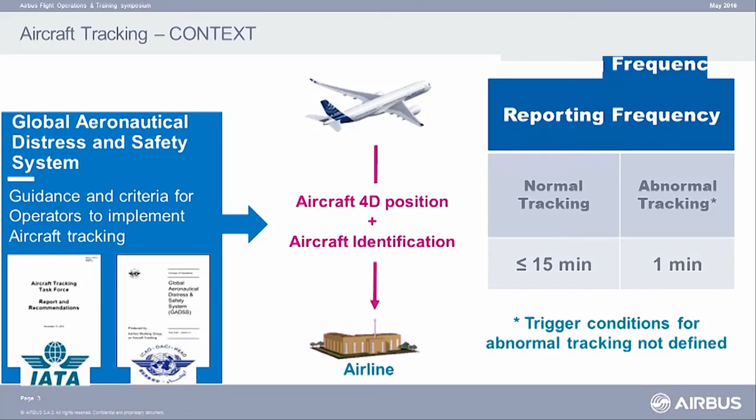Last year, during our flight ops and training regional seminars, we presented to you the ICAO status, and we presented that ICAO intended to introduce a recommendation on normal tracking for both oceanic and remote areas in November of last year, and they planned to make those recommendations applicable from November of this year.

As ICAO has changed this position since last year, we decided to make this presentation to give you an update on the regulations, as well as to present to you our solutions on aircraft tracking.

So today my presentation will be divided in two parts. First of all, we will review the regulations, including information on local regulations, and then I will present to you our solutions.

As I said in the introduction, ICAO intended to make the recommendation on normal tracking applicable from November of this year. But the Air Navigation Committee identified that this would create an undue burden for the industry if some open points were not clarified before the applicability date.

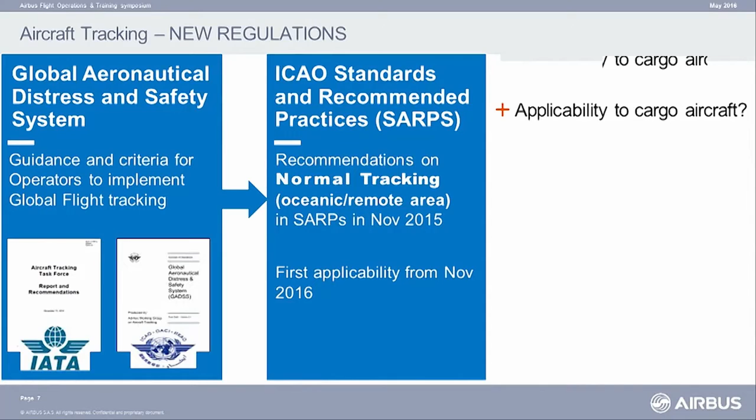These open points include the following: what about the applicability to cargo aircraft? Today, the regulations do not apply to cargo aircraft, whereas some member states do not agree with this position.

What about operation in polar areas, where we have some data link communication coverage issues? What about operations with limited flight over oceanic areas? Do these recommendations apply to this type of operation?

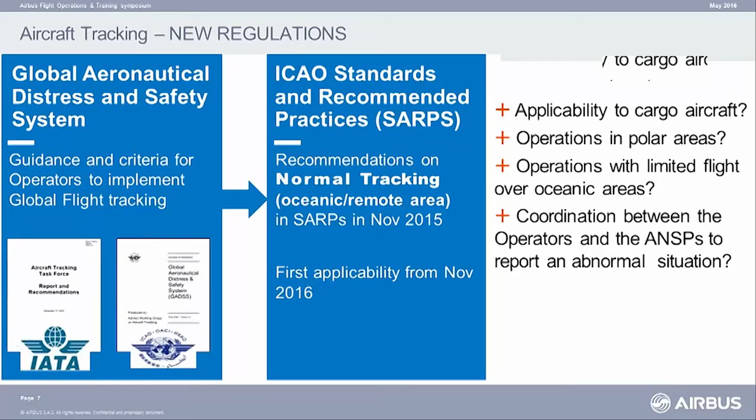And finally, there is a need to set up proper coordination between you, the operators, and the air navigation service providers in case of abnormal situations, including the non-reception of position reports.

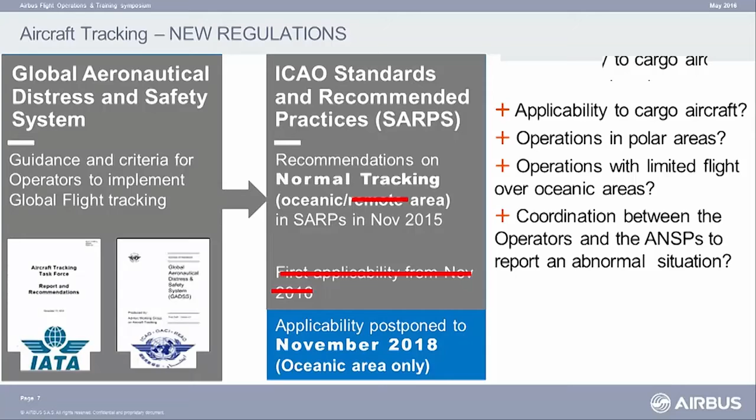As all those points are still open, ICAO decided to postpone the applicability date of those recommendations to November 2018. They also decided to reduce the scope of this applicability to oceanic areas only, because there is no standardized, clear definition of remote area.

Having said that, what about the national authorities? They have to define their own regulation, and it's up to you to monitor this regulation. It's important because the local regulation may differ from the ICAO recommendations.

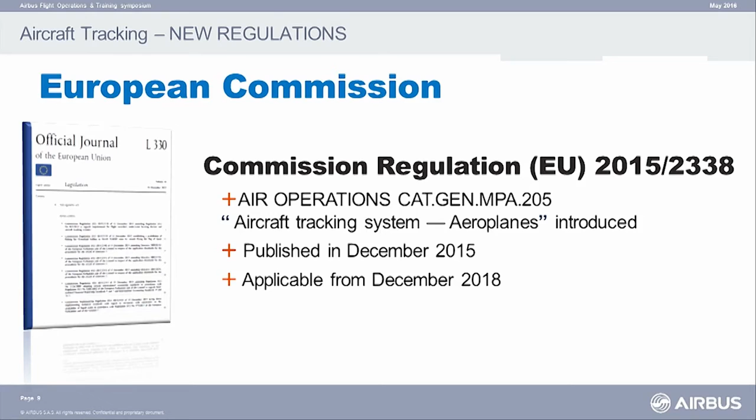There are already some regulations that have been published. This is the case of the European Commission, which has published regulation on aircraft tracking systems in the air operations regulation. This regulation will be applicable from December 2018.

Concerning the civil aviation authorities of Singapore, they have also published their own regulation, applicable from July 2016, this year. But there is a specificity with this regulation.

In fact, if you read this regulation, it clearly stipulates that the aircraft tracking system shall not make use of a voice report through HF.

What does it imply? In fact, it implies that to cope with this regulation, you pilots can use position reports by voice using other communication means. But from November 2018, you will have to implement an automatic reporting system.

So this is an example of local regulation for which the requirements differ from the ICAO recommendations.

Having said that, what about our solutions? For those who were present last year in our regional seminars, we presented 3 solutions that have the advantage of being easily implemented with no additional workload for you in the cockpit. These solutions are not applicable for A300-600 aircraft as well as for the A310 aircraft. I will come back to those aircraft types later on in my presentation.

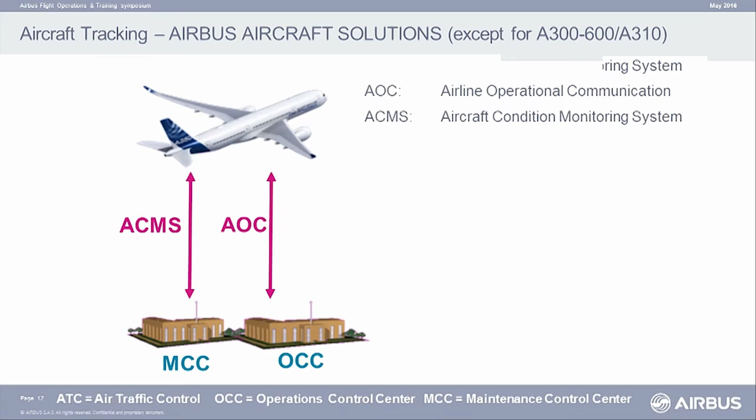The 3 solutions that we have proposed to you are, first, the use of the AOC function, which is used by you pilots to exchange data link messages with your OCC center. The other possibility is the use of the ACMS solution, which is used to exchange maintenance messages or engine parameters with your maintenance control center.

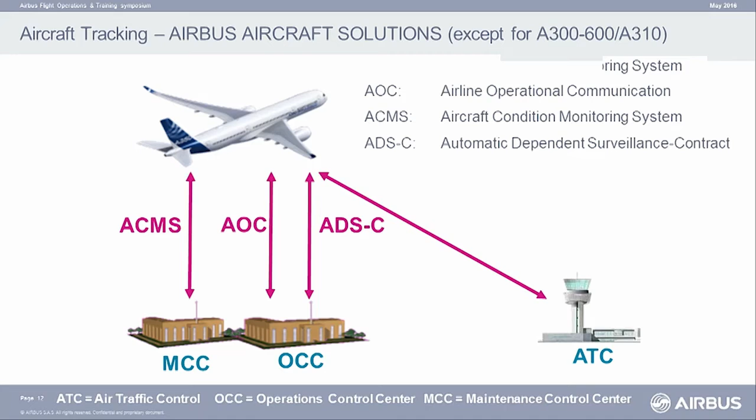The last solution is the use of the ADS-C. The ADS-C is basically used to transmit position reports to your ATC center, but it can also be used to transmit such information to your OCC. So what we are going to do now is review the 3 solutions and see the advantages and limitations of each. First of all, regarding the normal tracking capability, they all have this capability.

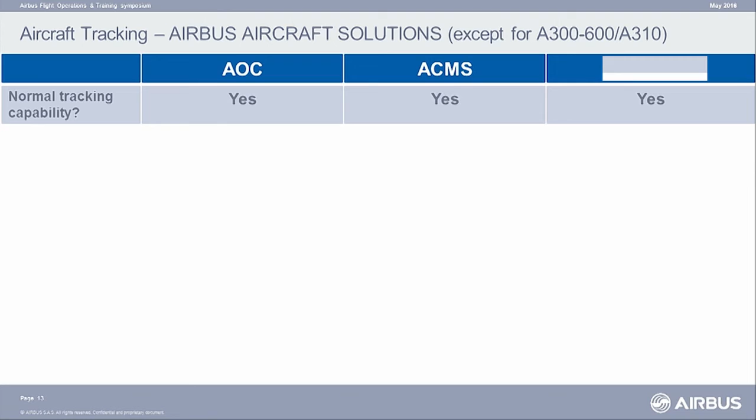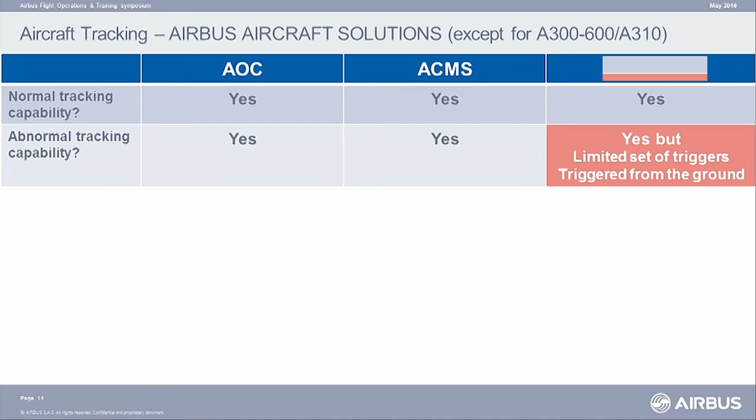Then, abnormal tracking capability - there is a limitation with the ADS-C solution. As I said, this solution was basically set to transmit position reports to the ATC center, and therefore this solution is standardized. So there is no possibility for you to customize the messages exchanged with the ground. The only possibility to trigger the abnormal tracking mode is by receiving on ground the so-called on-event message. As there is a limited set of on-event messages in the standard, there is a limited set of conditions to trigger the abnormal tracking mode.

Regarding priority in terms of communication through ACARS, because this is the ACARS network which is used for those solutions, the ADS-C messages have the highest priority, and the ACMS messages have the lowest priority. For the ACMS messages, in case of abnormal tracking condition, there is a high probability that maintenance messages will be transmitted to the MCC. Therefore, there is a probability that the position report messages be delayed.

For the ADS-C solution, if you use this solution, you will transmit position reports to your OCC, and this could downgrade the performance of the transmission of position reports for ATC purposes. So we are not in favor of such a solution.

Regarding the impact on hardware, for the two first solutions, there is no impact if you are equipped with data link, including the appropriate communication means for the routes you plan to operate. For the ADS-C solution, there is no impact if your aircraft is equipped with FANS-A or FANS-A Plus solution for the A320, 330, and 340 family, and this is basically the case for the A350 and A380 aircraft.

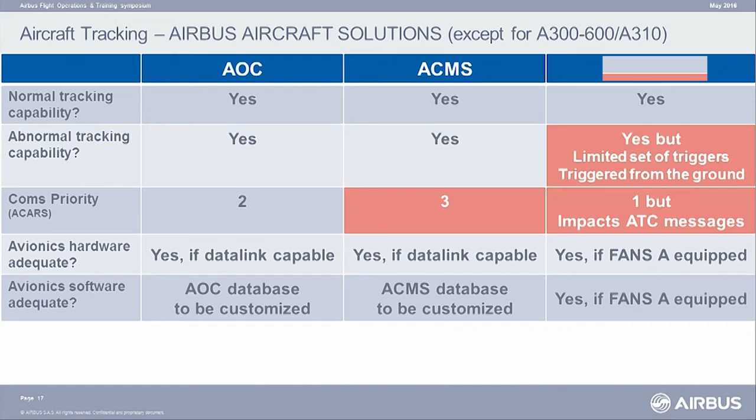What about the impact on software? For the AOC solution, you'll have to customize the AOC database. For the ACMS solution, you will also have to customize the ACMS database. And finally, for the ADS-C solution, you'll have to implement a logic on ground to trigger the abnormal tracking mode.

Regarding the cost impact, for the three solutions, as you will transmit new messages, there is a cost impact due to the transmission of data, and the cost varies according to the contract you have established with your data link service provider. For the AOC solution, you will also have to customize the database - this is also the case for the ACMS solution. And for the ADS-C solution, you will have to put in place a logic to trigger the abnormal tracking mode.

So we have seen that there are some limitations for the ADS-C solution, and there is a limitation for the ACMS solution. So to conclude, the optimized solution, and the solution that we recommend to implement, is the AOC solution. This is a solution that we know some of you operators already use to transmit position reports to your OCC centers.

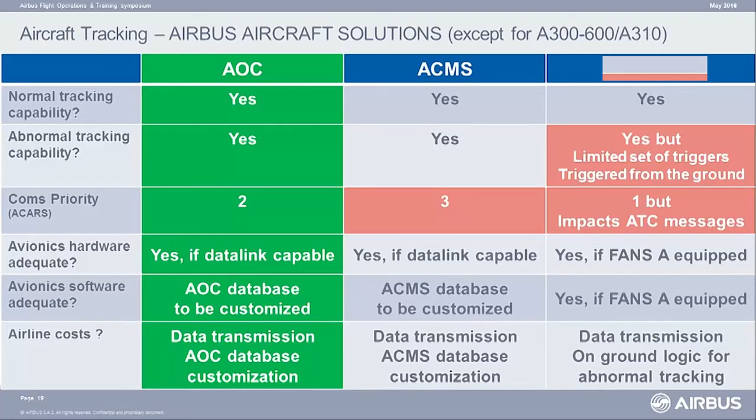Having said that, what about abnormal tracking and what about conditions to trigger the abnormal tracking mode? As I said in the introduction, ICAO relies on the industry to make proposals on conditions to trigger the abnormal tracking mode, and this is what we, Airbus, have proactively done.

So what we have done: we have analyzed data from more than 1,000 real flights, we have also performed flight tests, and we have defined a set of conditions to trigger the abnormal tracking mode. An important thing is that we want to avoid spurious triggers. So this activity is now completed.

The next step for us is to launch the development of AOC solutions. So we have started discussion with our AOC providers, Honeywell and the other provider, to define a generic aircraft tracking solution which is valid for both normal and abnormal tracking. The other provider is Rockwell Collins.

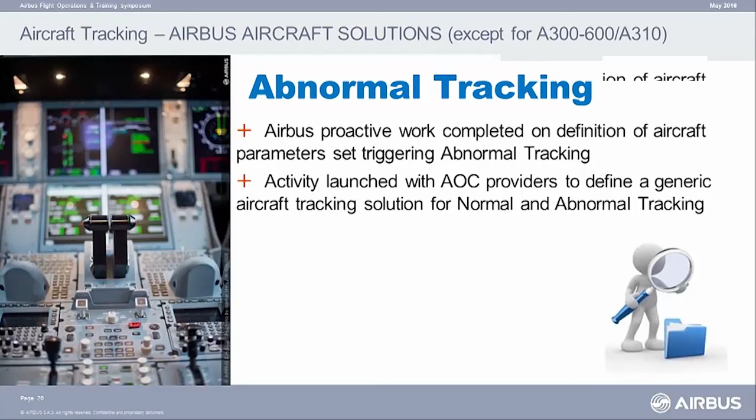What about the A300-600 and the A310? For those aircraft types, the only solution we can propose to you is based on the use of the DFDAMU. There is a limitation with this solution because we do not have the capability to detect abnormal conditions. That is to say that the only way to cover normal and abnormal tracking mode is by sending the position report every single minute.

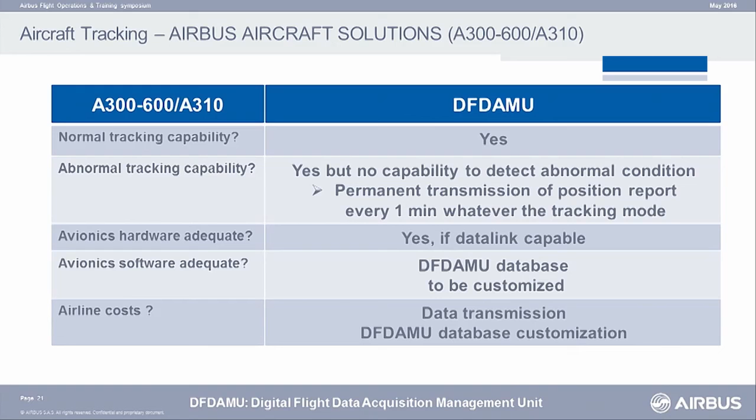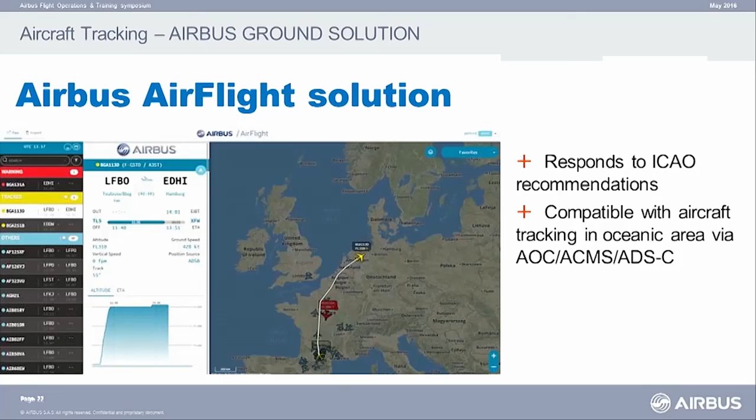That was for our solutions within the aircraft. What about the on-ground solutions? As already presented during this week, we have a solution called AirFlight, which responds to the ICAO recommendations and which is in line with and compatible with our solutions. So if it's not already done, I invite you to go to the booth if you need more information regarding this solution, because this solution can provide much more information than only aircraft tracking. Have a look at this solution.

So to conclude: first of all, compared to what we had said last year during our regional seminar, ICAO has decided to postpone the applicability date of the recommendation on normal flight tracking. Now the new applicability date is November 2018. Today there is no requirement, no recommendation on abnormal tracking.

As I said, there are already some national regulations published related to this subject, and you should pay attention to those regulations that may differ from the ICAO recommendations. On our side, we have defined a set of conditions to trigger the abnormal tracking mode, and we are working with the AOC providers in order to propose to you a generic solution which is valid for normal and abnormal tracking mode.

To finish, I would like to remind you that all this information is already available on the Airbus World Portal via an OIT and an AESI, and should there be new information on this subject, we will update those documents accordingly and send you a news update to have a look at this updated information. Thank you very much.